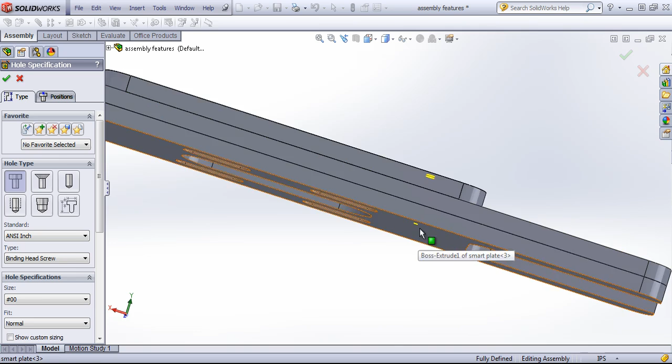One of the reasons this is useful is that you can add multiple holes without having to position each one on each individual part. So if you position the hole on this top face, you can choose to have that hole go through each of these components. So I'll go ahead and choose a size.

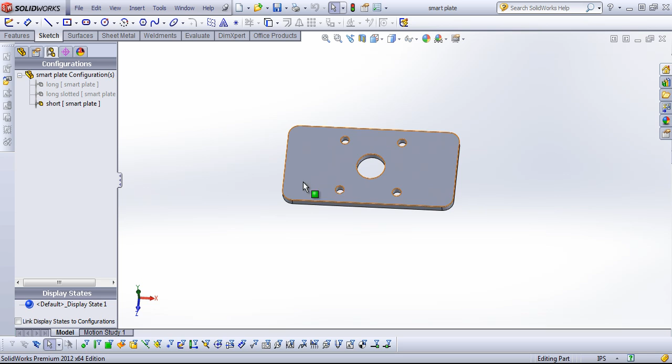And at the end I have a new option that's not available in the part interface, which says propagate feature to parts. If I leave this unchecked and I were to open up one of these parts, you'll notice that that feature isn't included with the part. And once again, if I edit the feature and choose that option, then those features will now show up within the part.

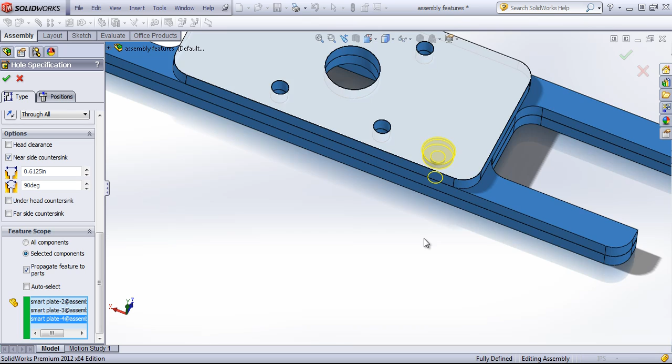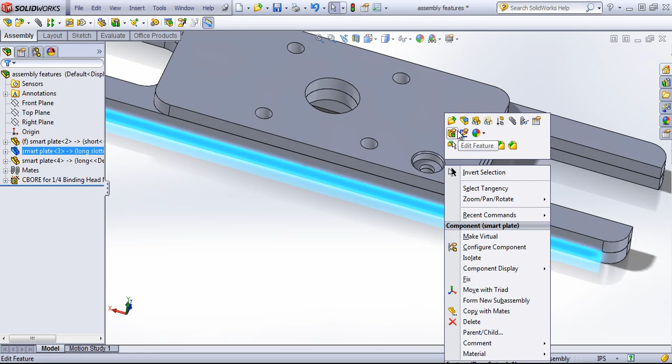You also have the option of selecting the feature scope. If, for example, we didn't want this going through the last plate, we could remove that out. Actually, that's the middle plate. So if I just chose those two, for example, it won't show up on that back plate. And now these holes will show up in the two parts that we've selected them for.

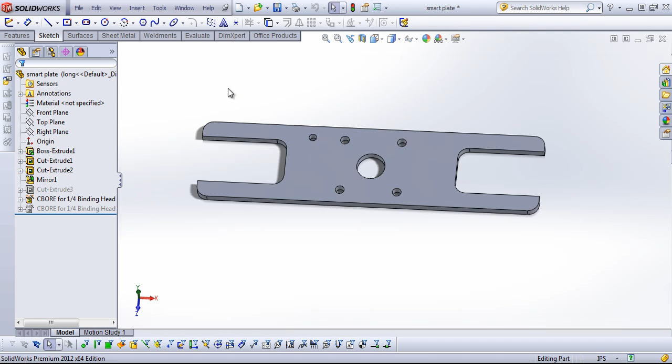And you'll notice that now it brings in this counter bore for a 1/4 inch binding head machine screw. You'll notice that you won't be able to edit the feature within the part. You'll only be able to change it within the assembly. Once you create a feature, you'll also have the option of adding feature patterns directly in the assembly as well.

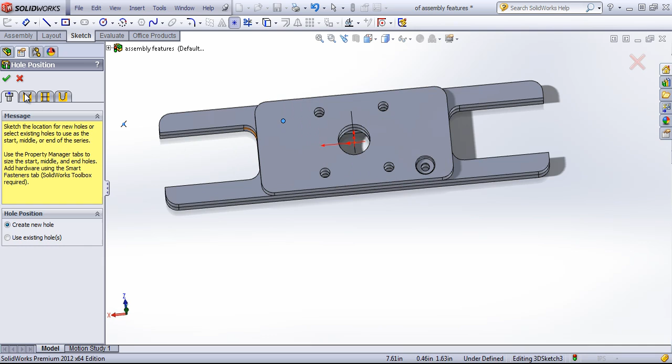We also have an option at the top called Hole Series, and this is roughly the same as the Hole Wizard, except it gives you better settings for the clearances of the hole between the different parts. So once again, if I choose that 1/4 inch binding head screw, I now have options to change the size of the middle hole. So any parts in the middle are going to have a different clearance size. For example, I can change this to 5/16.

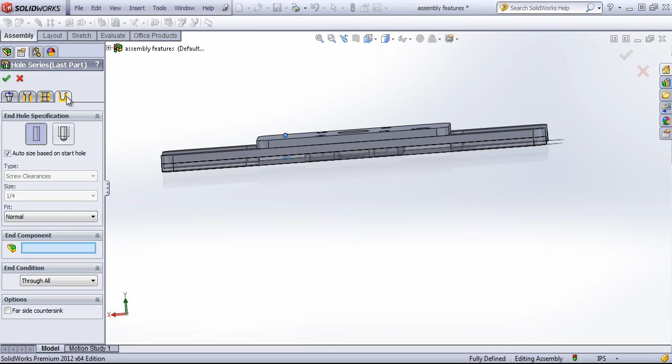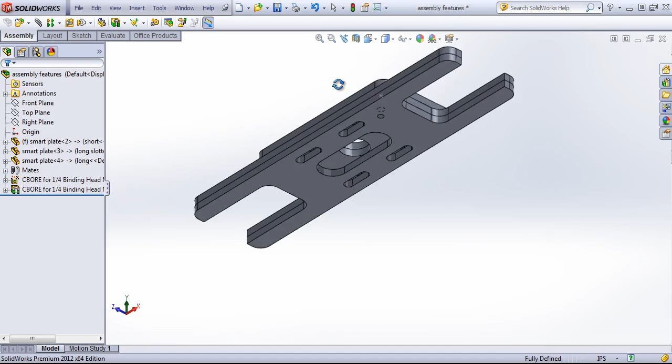And then I can choose my end condition, and in this case, if I wanted to have a clearance for 2 holes and then create a thread on the last hole, I can choose out an end component, and that'll end up being a thread. So now you can see in that gap we have a larger clearance, we have the threaded hole at the end, and we have that same counter bore on top.

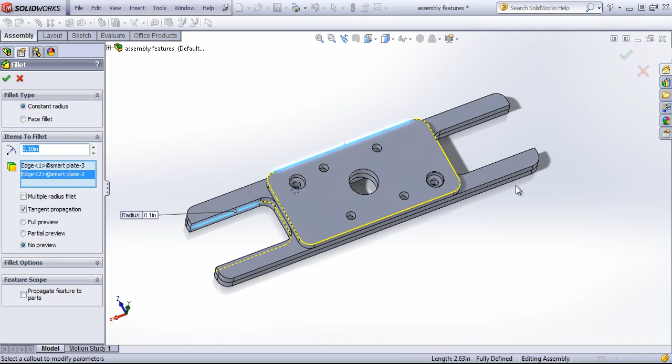Within the assembly features, you can add, once again, the Hole Series, Hole Wizard holes, simple hole, which allow you to just select a size and quickly add a hole, and the extruded cut as well as revolved cuts. You can add your fillets directly within the assembly. For example, if I choose out multiple edges from these 3 different parts, we can add those fillets as well as propagate those to the part.

And one of the advantages of that is that we can create all our fillets at the assembly level, and if we want to suppress them out for a little faster performance in a larger assembly, it's a little bit easier to do that than to have to go into each individual component and suppress those out.

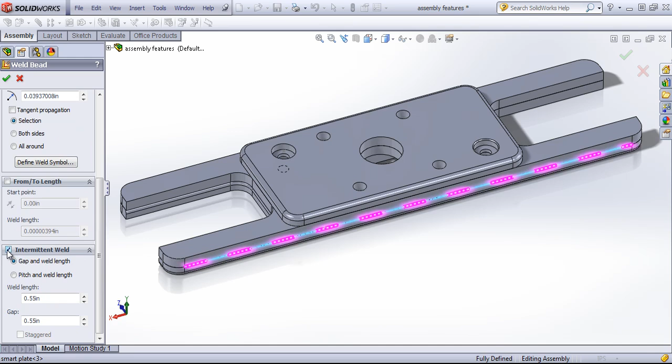Lastly, you can also add a belt chain feature to an assembly, as well as a weld bead for any welded parts. So we selected out an edge and set our parameters, we can choose the length. We can also choose if we want this to be intermittent, and then you can click OK. And that'll bring in the weld symbol as well as a weld folder. But that's how you can go about adding assembly level features to your assembly components.